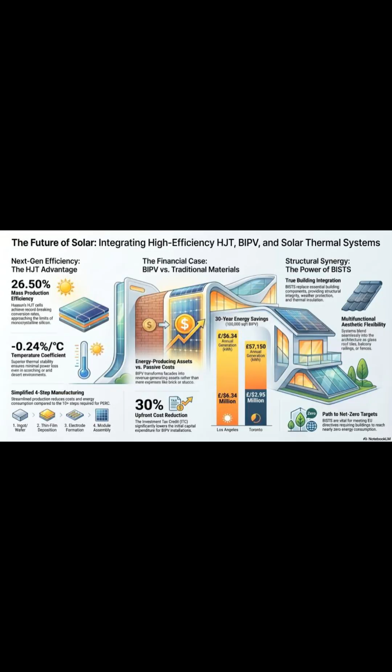Welcome the future of high efficiency HJT solar panels. These sources examine the technological advancements and economic viability of building integrated photovoltaics (BIPV) and solar thermal systems (BISTS).

One report focuses specifically on heterojunction HJT technology, highlighting its simplified production process, superior bifacial efficiency, and high energy yields in extreme climates. Another source provides a financial breakdown for solar facades, illustrating how initial costs are offset by long-term energy savings and tax incentives in urban environments.

Complementary research evaluates various solar thermal applications ranging from water and air heating to integrated storage solutions for residential and commercial structures. Together, the texts advocate for transitioning from traditional building materials to energy generating assets that serve both structural and environmental purposes. This holistic approach aims to achieve net zero energy targets by seamlessly blending renewable technology with modern architectural design.

The primary difference between BIPV, building integrated photovoltaics, and BISTS, building integrated solar thermal systems, lies in the type of energy they generate, although both share the same fundamental concept of integrating renewable energy directly into a building's architecture. BIPV focuses on generating electricity.

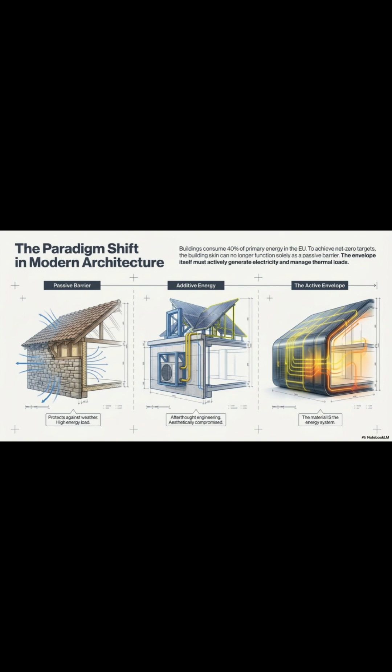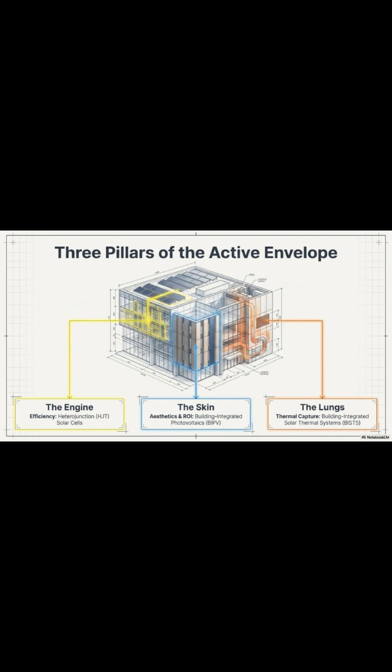BIPV systems incorporate photovoltaic solar cells directly into the exterior wall assembly or building envelope. These systems transform building exteriors into power generating assets, producing electricity while replacing conventional building materials like glass, metal panels, or stone cladding. BISTS focuses on generating thermal energy.

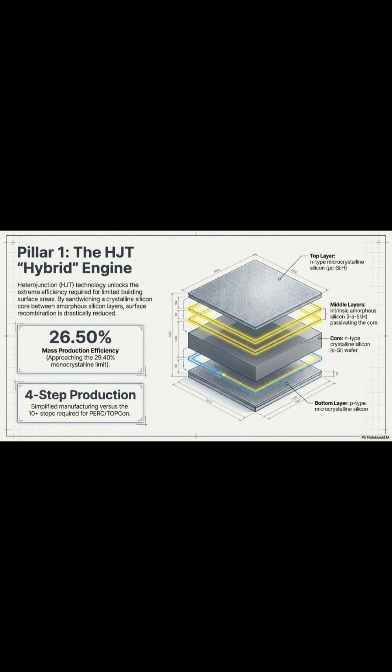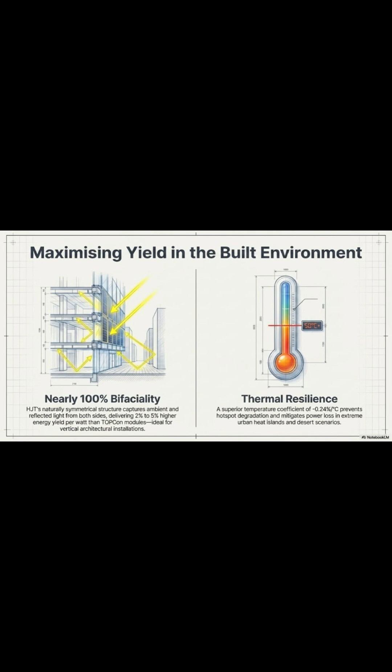This utilizes solar thermal collectors to produce heat. They contribute directly to a building's space heating, cooling, and domestic hot water requirements. Rather than generating electricity, BISTS typically circulate water or air as a heat transfer fluid to capture and distribute thermal energy. Similarities in building integration.

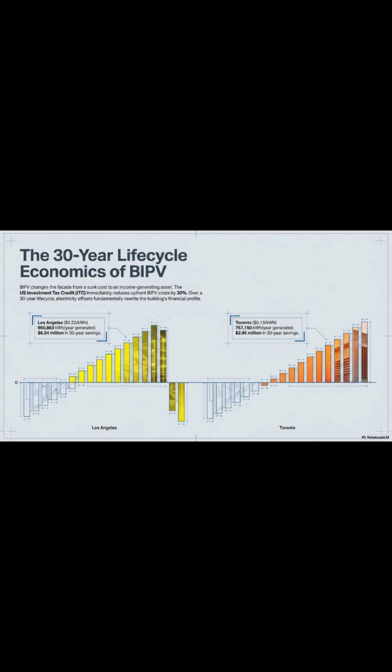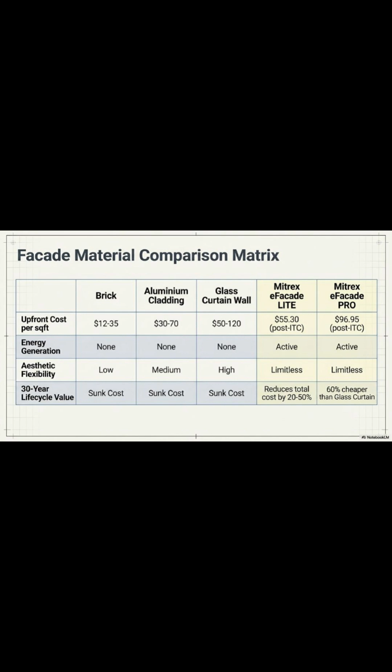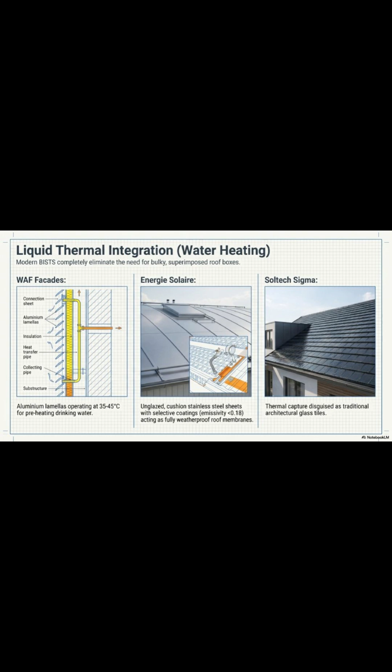Despite generating different types of energy, both systems are defined by their true integration into the building envelope. Rather than being superimposed on top of an existing roof like traditional solar panels, both BIPV and BISTS serve a dual function. They act as energy generators while simultaneously functioning as essential structural components that provide weather protection, thermal insulation, acoustic performance, or shading.

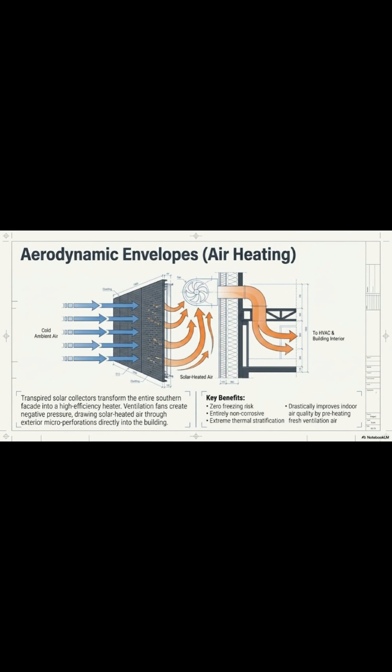Because they are a prerequisite for the building's functionality, if a BIPV or BISTS component is removed, it must be partly or totally replaced by a conventional building material to maintain the structure's integrity.

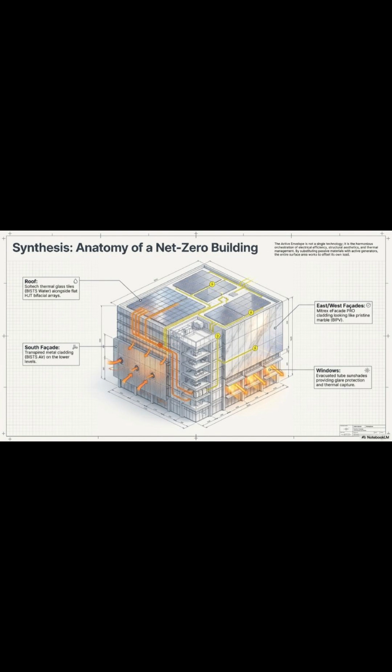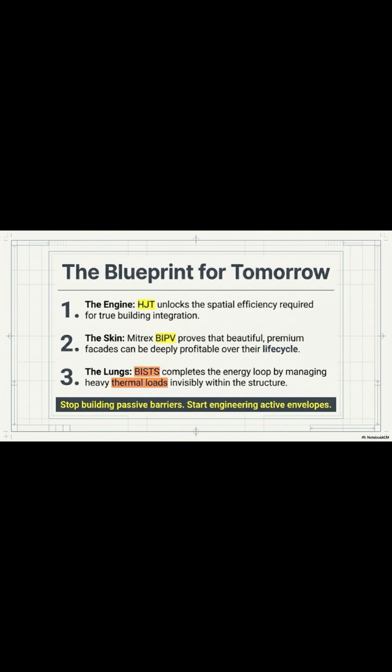Hybrid technologies. It is also worth noting that the two technologies can be combined into hybrid photovoltaic-thermal PV/T systems. These hybrid BISTS capture the heat released by the PV modules using circulating water or air, providing both electrical and thermal energy while increasing the total energy output of the panels.